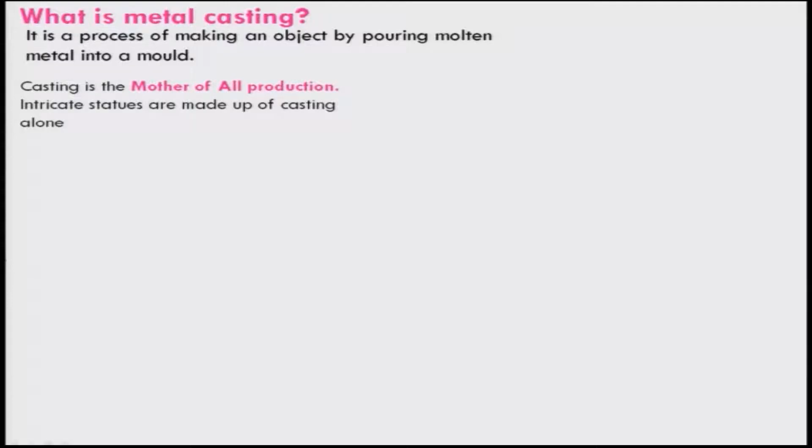And of course, casting is considered to be the mother of all production, and we know that intricate statues which are being used as idols for our worshipping purposes are made by casting alone. And if you look at it, the process involved in metal casting is very simple.

What one has to do is basically melt the metal, and then you will have to prepare a mold like what I have shown here. This is your mold, and pour into it, and once you pour, it will start to solidify due to the cooling effects, but it must be done properly, and then of course you will get a product. So, in a simple way one can say that casting has three processes: melt the metal, pour it into a mold and let it freeze.

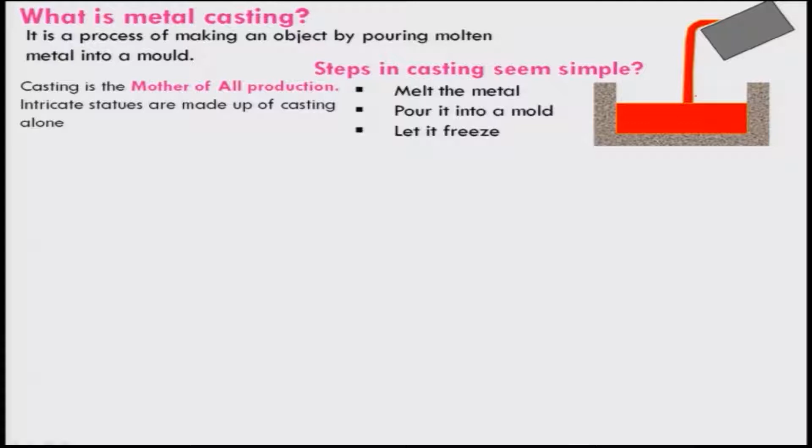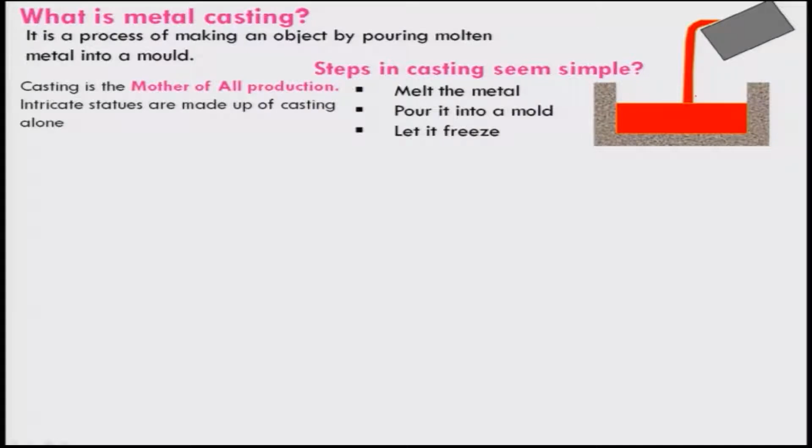So, of course, it looks to be very simple, but it is not. If you are not careful about making the proper mold, pouring it properly, and the solidification also taking place in a proper manner, otherwise a lot of faults will be there in the casting. And the casting methods are broadly divided into two categories. One is expendable mold casting, the other is non-expendable mold casting.

Some examples of expendable mold casting are sand casting, plaster mold casting, investment casting, and others. In plaster mold casting, plaster of Paris is used, but sand casting is quite old, and it was used in ancient times, and we will be discussing more about investment casting, which was used in ancient India profusely for making statues.

Non-expendable mold castings are those in which the mold will be used continuously. Some examples are die casting, continuous casting, and centrifugal casting. And casting is not related only to metal. It can be used for making glass; even in concrete buildings, for concrete slabs and other things, we do use casting. And keep in mind that some of these techniques we will also be discussing during the glass making process.

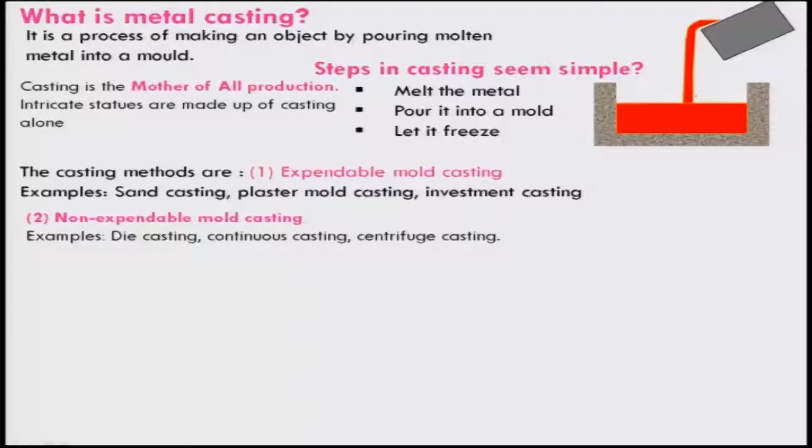Let me talk a little bit about the terminology used for metal casting. I have shown here a mold, a sand mold, and this has what you call a flask, or a body in which you will be preparing the mold. It has two halves, with a parting line here. The lower part is known as the drag, and the upper part is known as the cope.

And of course, the side view of this entire mold system is shown here, which has the cast metal. This portion is the pouring cup through which the metal will be poured. It has a conical shape, and then slowly this pipe decreases, and this is known as the down sprue. After that the metal will flow through the runners, and there is a riser also in which the molten metal will be stored such that it will go slowly into the cavity in which the metal will be cast, and there can be a core placed inside, so that hollow things can be made out of this casting.

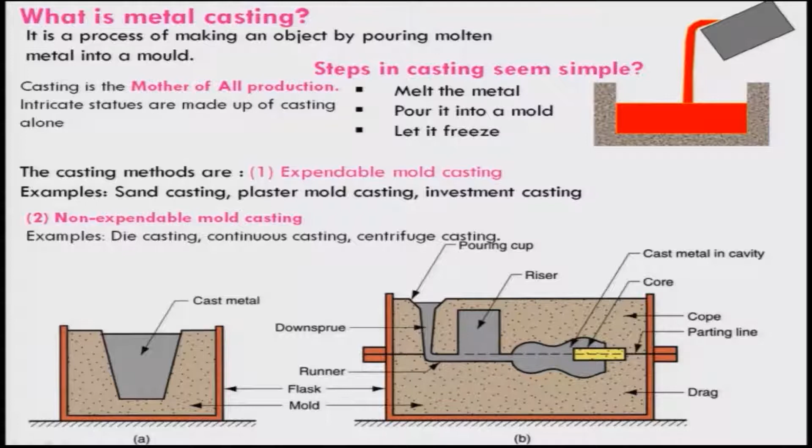This was basically made by casting, and it is considered to have been manufactured around 4000 BC, that means around 6000 years back. And of course, the size looks to be too small by today's standards; it is an around 11 centimeter high bronze dancing girl, made of bronze.

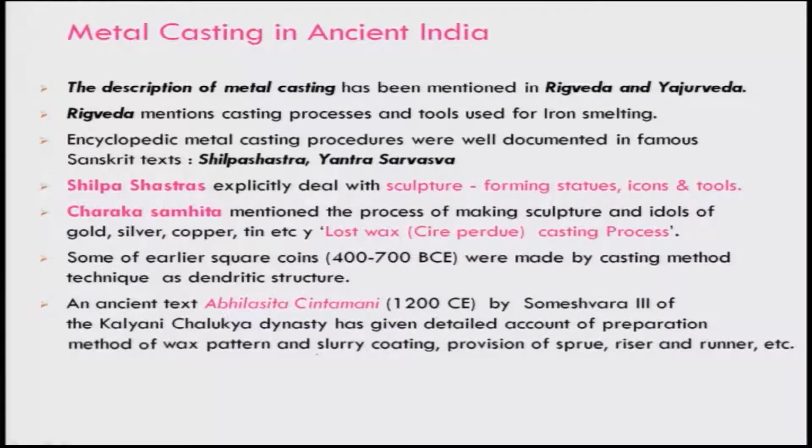Of course, besides this there are several other kinds of tools like tongs. But what is important for statue making is basically the proportions or talamana, the stance, what we call mudra, and the expression or bhava. These are very important, part of an art, and you should have a feeling for that to sculpt in such a way that you get a good statue.

So, therefore, it is a combination of technology and art which was used for making the statues. That is a very important point you should keep in mind: not that you segregate and separate the knowledge, but rather combine it and make a product out of it.

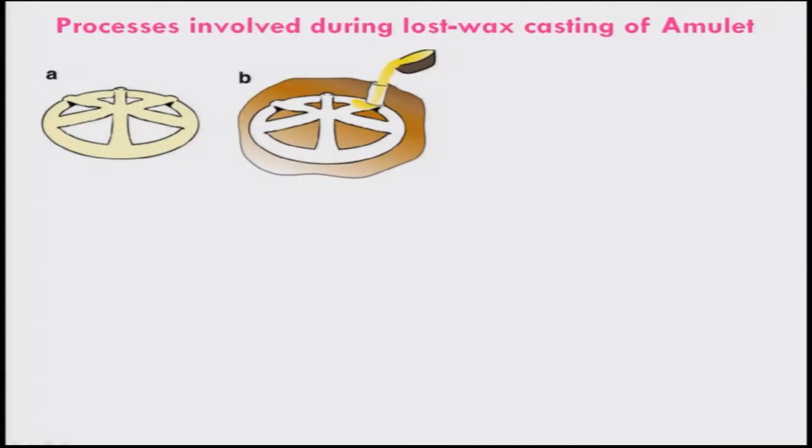They have also not only studied this extensively, they have also made a model of this same amulet using wax, with a rod of circular diameter, and then made it into 6 pieces joined with a ring. This model is created first, and after that they use some kind of clay to form a mold out of this model. This model is made of wax, which can be melted easily at a very low temperature compared to the metal.

So this can be heated such that the wax model melts out, and the shape is formed. After that you pour molten metal through this sprue, and the metal flows through all the places, and solidification occurs, giving this piece. After that you break the mold once it solidifies completely, and you get this metal cast amulet. This is the rusted one we had seen earlier.

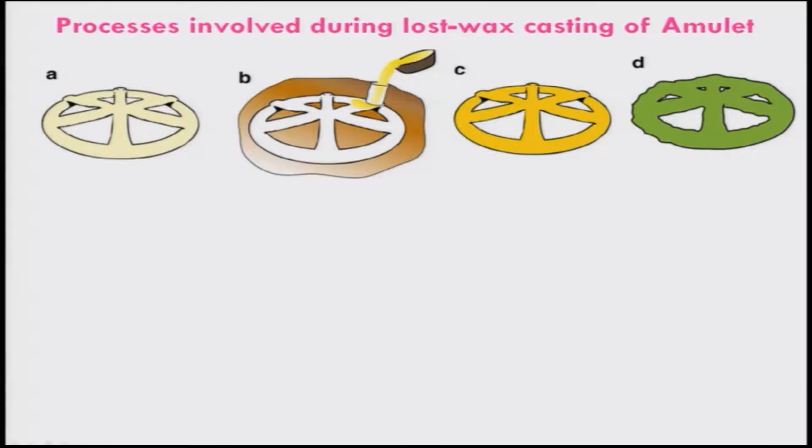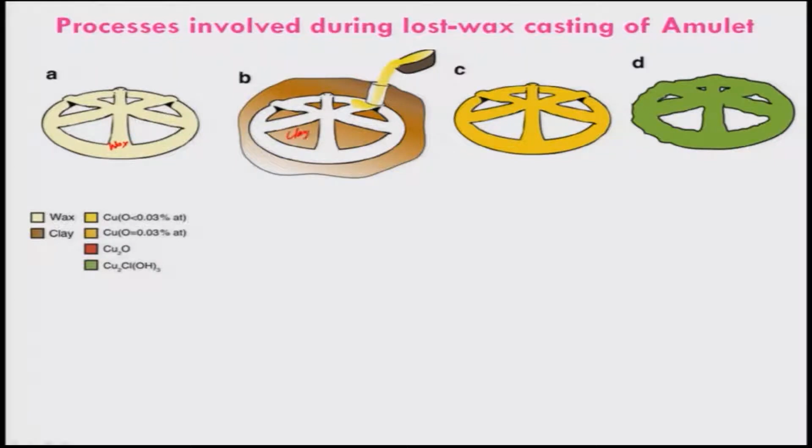They have also looked at this casting process, taking a smaller portion and investigating it using modern imaging techniques. As I told earlier, this is basically wax, and this is the clay throughout. They looked at a small portion to find out what is happening during the solidification process.

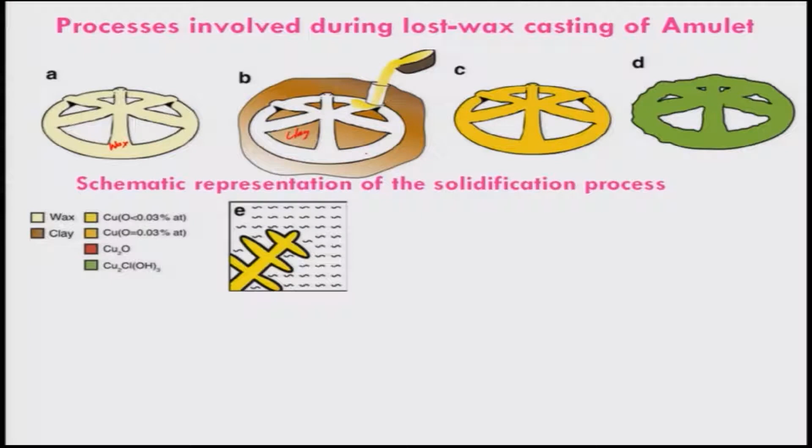They found that there is a dendrite structure forming when the temperature is between 1085 and 1066 degrees Celsius, with dendrite growth of metallic copper, and oxygen around 0.03%. Then at around 1066 degrees Celsius, cuprous oxide and copper eutectics are formed. As a result, the liquid phase solidified into saturated copper, and also copper and cuprous oxide rod-like structures, as shown here.

Subsequently, this final metal structure of dendritic copper crystals formed throughout this domain, surrounded by oxygen-saturated copper. If you look here, the red regions are basically cuprous oxide, and the yellow one is the oxygen-saturated copper.

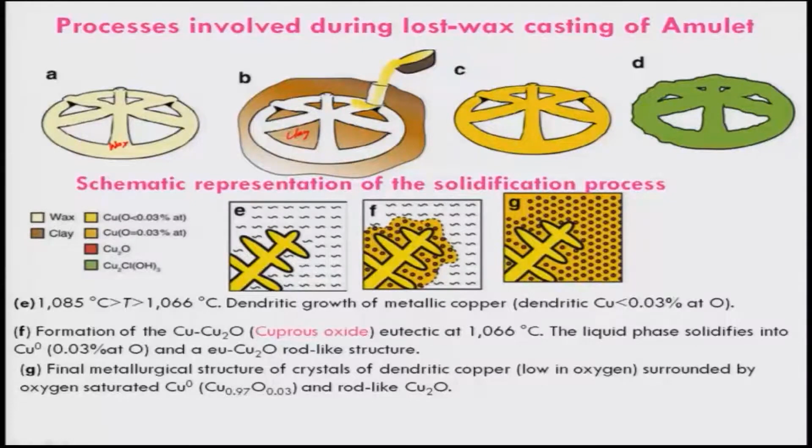As a result, they get rod-like structures of cuprous oxide, but finally, in what is actually a 6000-year-old artifact, researchers found copper oxychloride phases within the dendrites, while the saturated copper fully oxidized to cuprous oxide within the eutectics. As a result, this eutectic cuprous oxide is preserved, and they have found this and mentioned that this is the oldest artifact made by lost-wax casting across the globe.

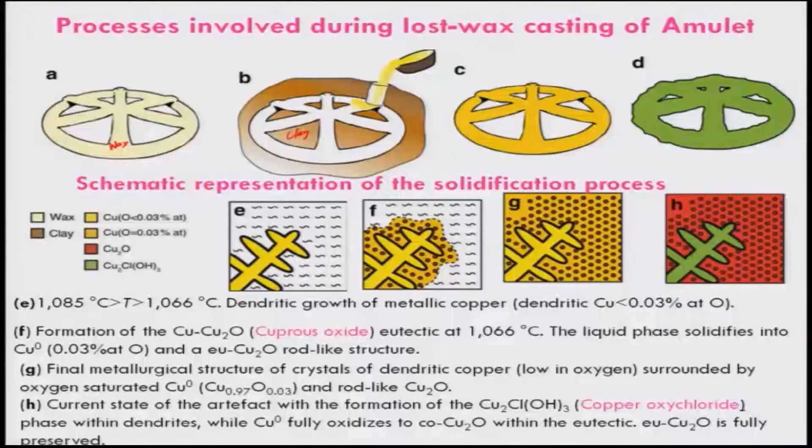That means it was made in India basically. Of course, there is a large gap in how this technique propagated from the Indus Valley civilization toward the south and other parts of the country. But literary evidence suggests that this technology migrated from there toward the south, with metal casting art starting in South India around 600 to 900 CE under the Pallava dynasty, and attaining its peak during the early Chola dynasty, around 900 to 1300 CE.

And of course, this thing was being propagated and also supported by the king at that time. As a result, there is a confluence of culture and abundant resources around Thanjavur, Cauvery Delta region, and it attained its peak in terms of technological development, combining art with science. This is very much an amalgamation of both art and science together, and this is the Tanjore region where it was being developed in earlier times.

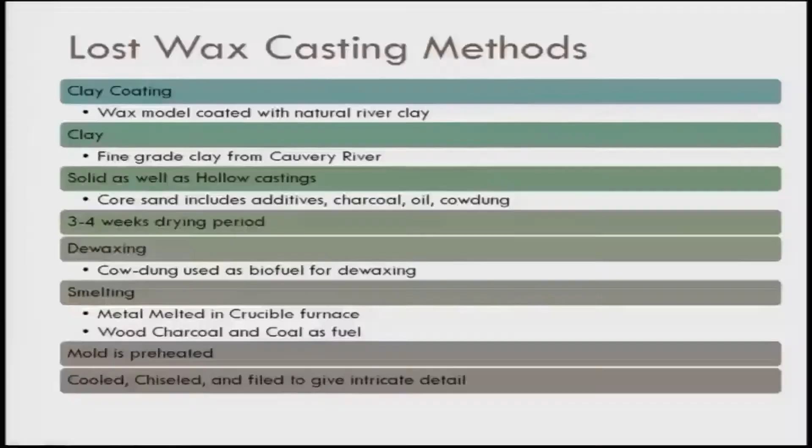So let me show you a video which I have taken from the internet.

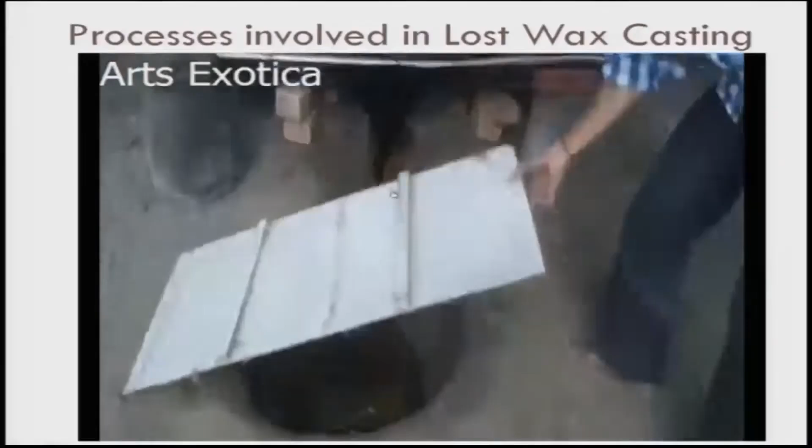And then of course, this is another one, a Nataraj statue that is coming up, and it has been fired so the wax drains out because of preheating, creating space for the melted metal to go in. You get the statue, which is Lord Shiva as Nataraj, quite complicated, and out of just one casting he could manage to do it.

Of course, this is another statue which is showing. So you can see the process looks very simple, but it is very intricate, complex, and time consuming, requiring a lot of patience.

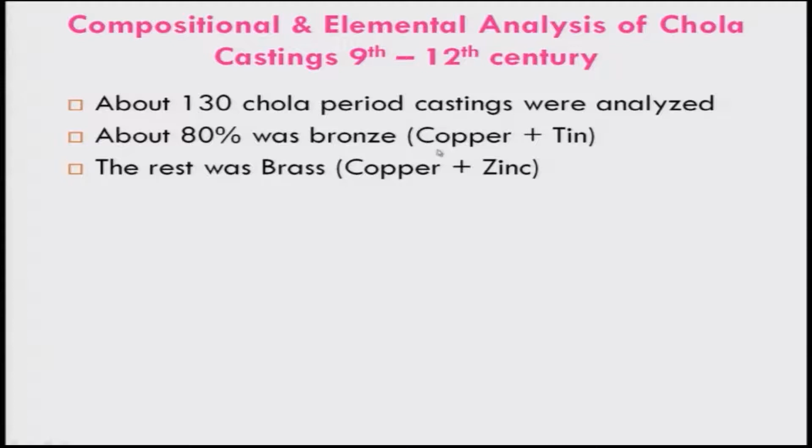A lot of research work has been done, but I will show you some of it - compositional elemental analysis of Chola castings. About 130 Chola castings were analyzed, out of which 80% are bronze, made of copper and tin, the rest are brass, made of copper and zinc.

And of course, people have used alloying with lead to facilitate casting, and their proportions are fixed, passed from one generation to another, and this technology is kept as a secret.

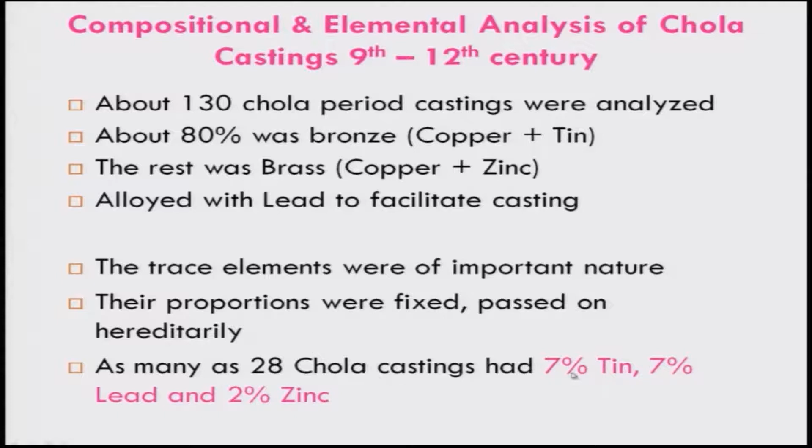So, also the material composition: as many as 28 Chola castings had 7% tin, 7% lead and 2% zinc, and of course the rest will be copper. And this technology also flourished during the Vijayanagar dynasty, 13th to 14th century, and they had of course the lower tin composition, 2.5% tin and 3% lead.

And this gradual transition of this method of producing statues took place from south to north India, passing through the Vijayanagaras, Nayakas, Marathas to northern India, as far as Nepal and Pakistan. So, as I told earlier, it has taken one circle according to the present interpretation.

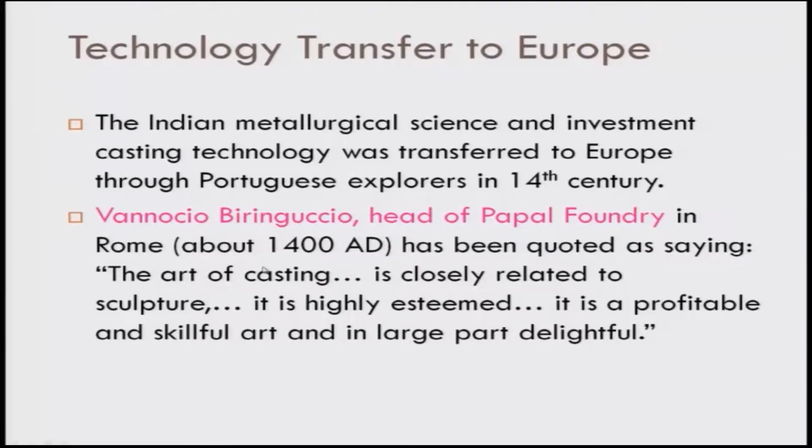Why are they saying this? They are saying that the head of the papal foundry in Rome around 1400 CE, his name is Vannocio Biringuccio, has been quoted as saying that the art of casting is closely related to sculpture. Of course, he has told a lot of other things. It is highly esteemed, a profitable and skillful art, and in large part delightful. So, this is the ethos Indians were having, maybe one can say that way, but more conclusive evidence is required.

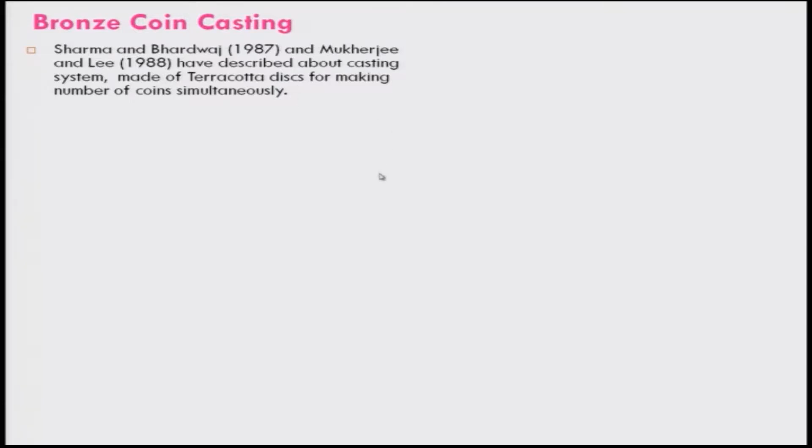Let me discuss another very interesting casting methodology which evolved in our country, particularly for making bronze coins in several quantities at a time. For that, Sharma and Bhardwaj and later Mukherjee and Lee have described this casting system made of terracotta discs for making a number of coins simultaneously, like a mass production of coins.

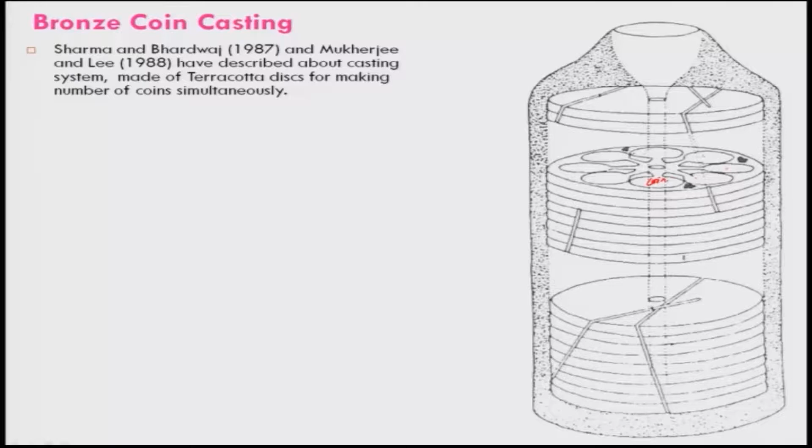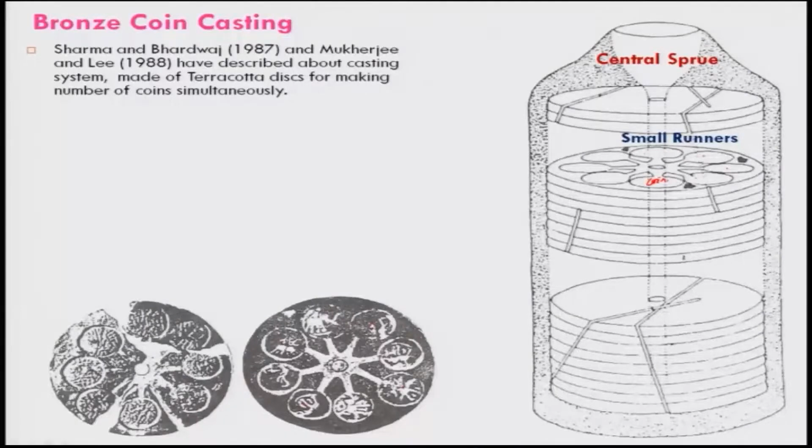Let me just show you this mold assembly. If you look, these are the coin molds, and there is a central sprue here. The metal will be poured in this and it will be coming through everywhere, and these are the small runners going to all these discs. So, if you look at this, 1, 2, 3, 4, 5, 6, 7, 8, you can get eight in one plate itself.

This is your sand molding box, and the metal is poured, as I told earlier, through the central sprue, and molten metal enters into these places through the runners.

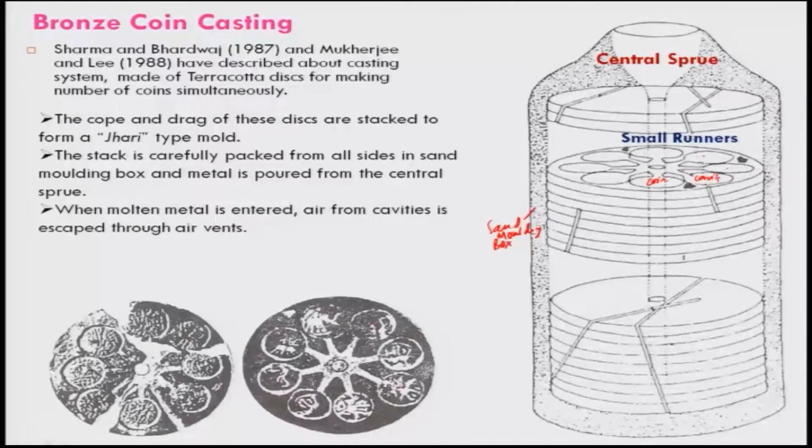When it is entering, it is important that some air vents are provided such that air from the cavities, these are the cavities, will be going out, so that you will get a very good coin without much problem.

So, let me talk about another very interesting thing which I got yesterday only, that is the metal mirror craft of ancient India. The evidence says that flat circular tanged mirrors made of low tin, around 10% bronze, were found in Quetta, the Harappan region and Dholavira around 2000 BC.

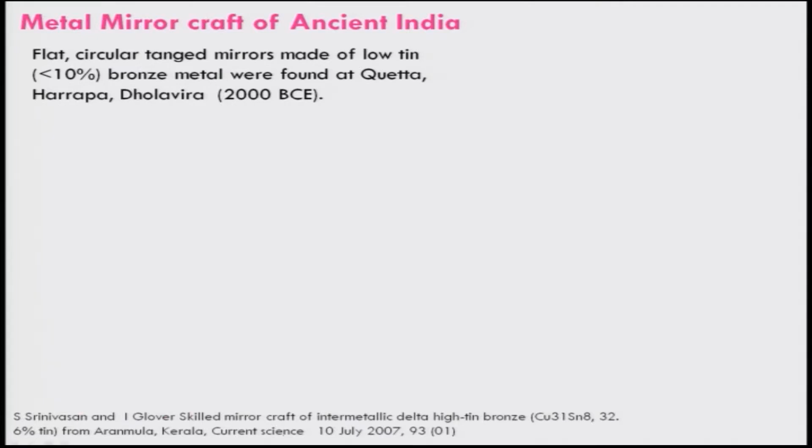And this work I am describing I have taken from Sharada Srinivasan and I. Glover, an article which was published in Current Science. I have given the reference here; you can see it is quite a complex thing.

Today it is being fabricated in Kerala in a village known as Aranmula, and this is very famous, known as the Aranmula mirror, which in Tamil and Malayalam is known as Valkannadi, and was used in earlier days as an auspicious article during the Ashtamangalyam.

The Ashtamangalyam is used not only in the south, even on the eastern side, and this tradition was continuing from around 100 to 200 CE, as we have evidence from Jain votive tablets of the Kushan period, which included a mirror as a part of the Ashtamangalyam set. So, this metal mirror was used as a part of our culture.

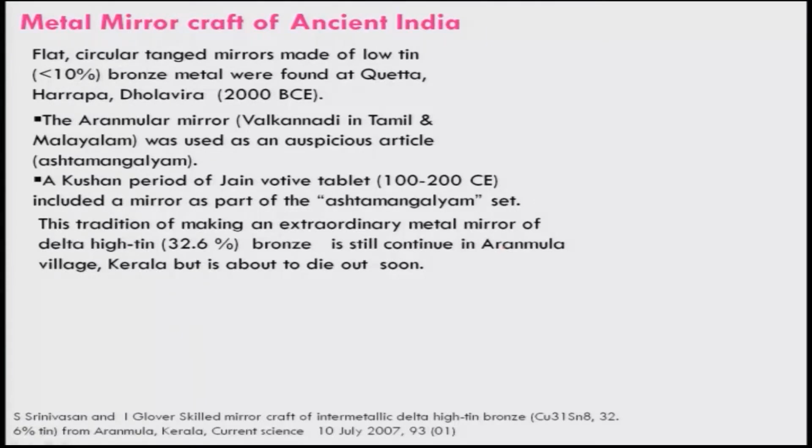And interestingly, the tradition of making this metal mirror of delta high tin, around 32.6% bronze, still continues in Aranmula village in Kerala, but it is about to die out soon, because people are not interested in doing that. And it is so interesting and so good that one should think of why one should not continue it.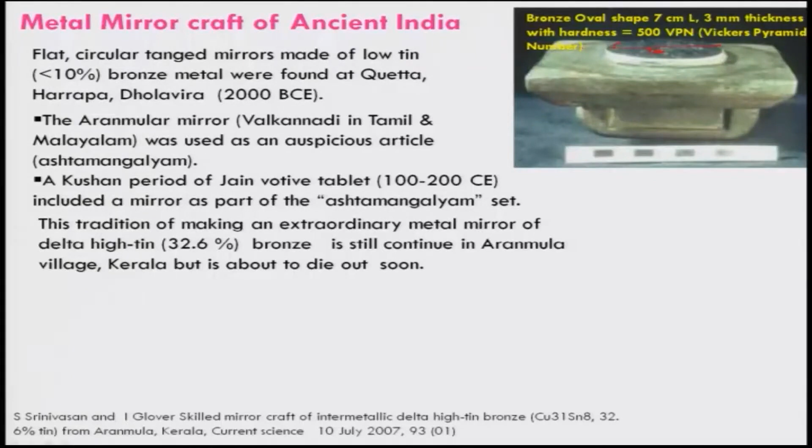Of course, it has been described how they made it, which I will not be discussing due to the paucity of time. They have used basically a crucible cum mold. The mold will be here, and the upper portion is the crucible. They melt it here and pour it.

And interestingly, the cooling is also done by clay cooling, which is a fast cooling. They have to invert it after casting, so that the temperature will be maintained around 540 to 350, so that the delta phase of this interesting alloy will be maintained.

And during the polishing process, the hardness also increases. So, the delta phase in this interesting alloy is optimized by clever casting and polishing processes, such that it is converted into a silvery colored, high hardness mirror. The melting temperature is around 750 degrees Celsius, but they have to maintain this temperature so that you will get hardness.

So, the mirror is skillfully manufactured using low technology and organic and common materials to produce a sophisticated high technology end product. And that was a tradition going on from 2000 BC till today, but it is about to die.